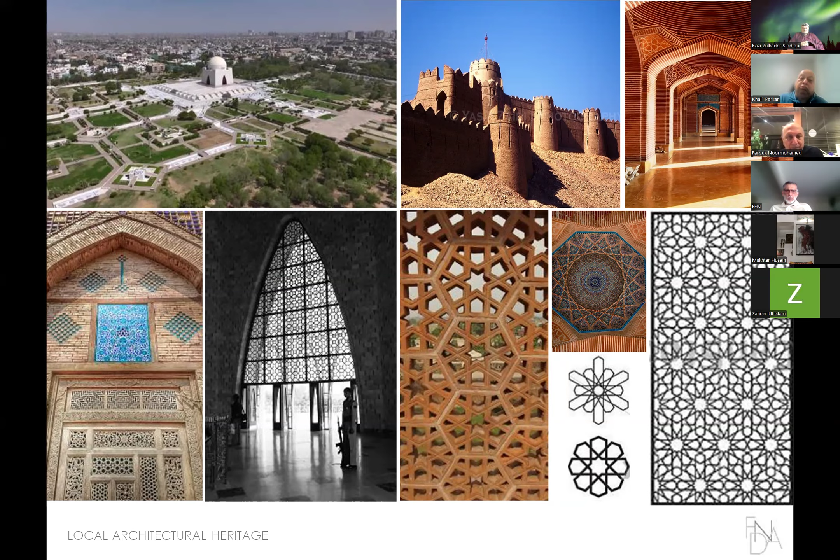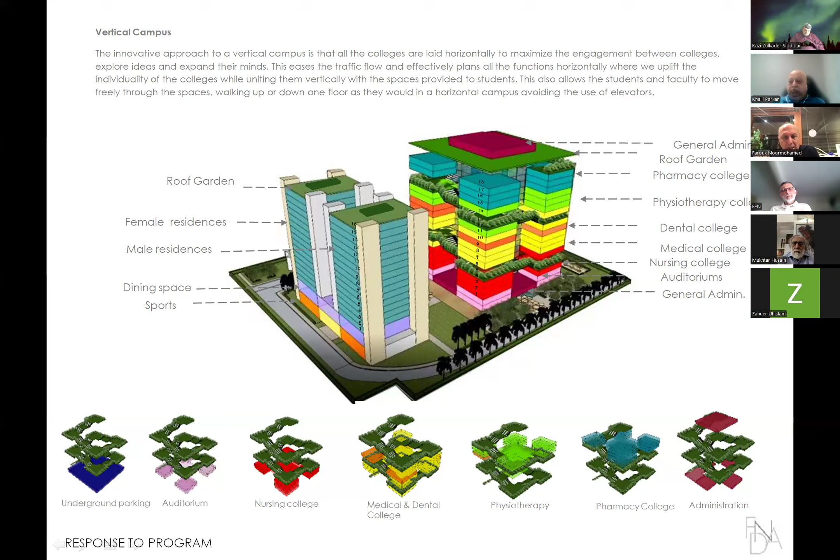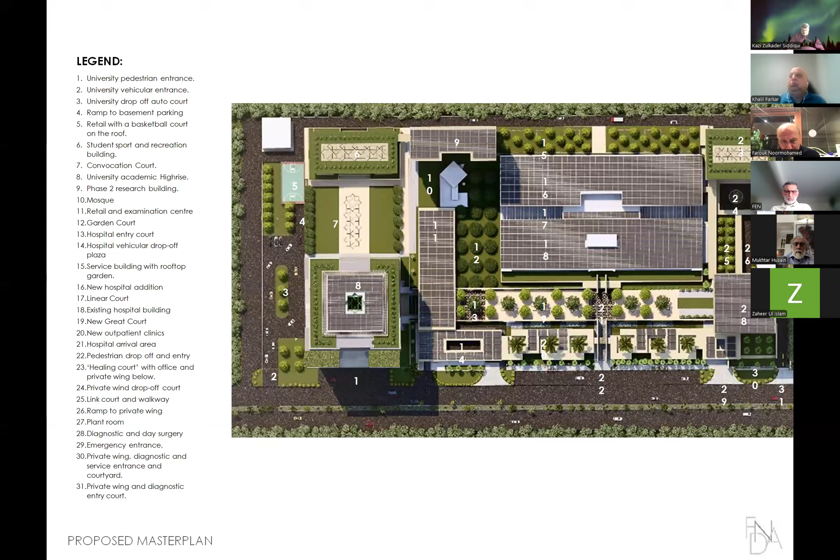So this is how it looks when it's all done as a tower. On the left is the academic, university portion, and the rest of it is the hospital on the right.

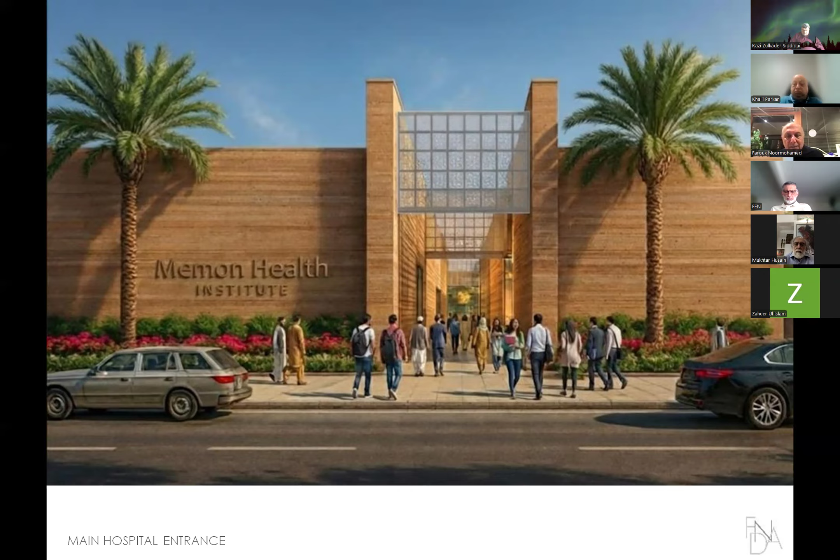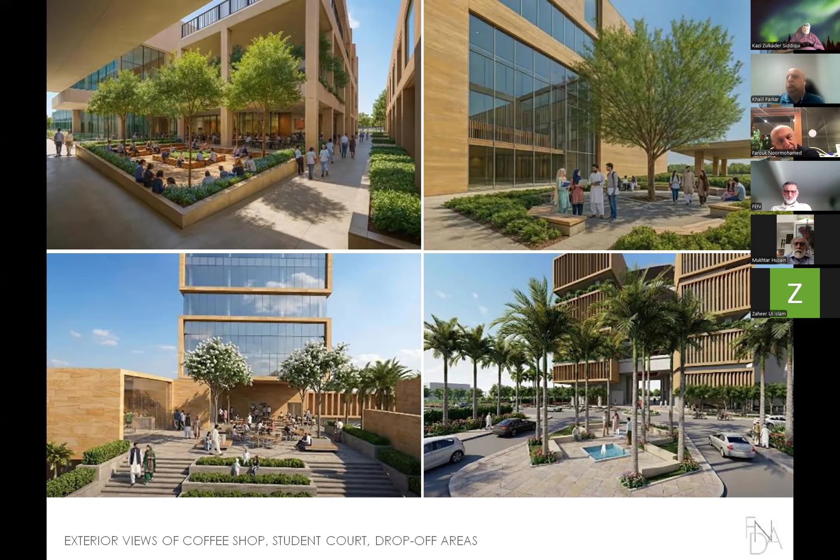So these are some of the images of what this campus is likely to look like. If you see the bottom left corner, you can see a courtyard that people are walking out. There are a series of sitting steps that wrap around this building, and there are courtyards that happen every few floors. As you turn around, you basically have courtyards.

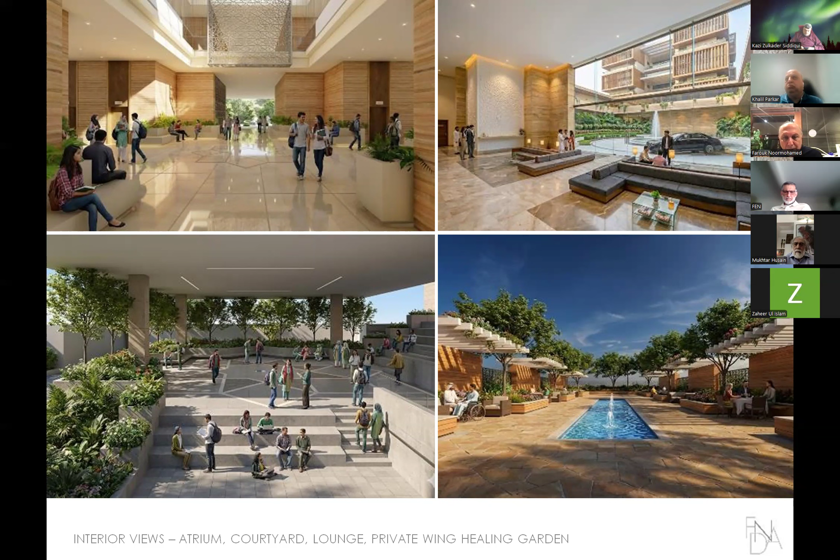The top left is the main entrance lobby of the hospital. On the top right is a view from the private wing drop off, and on the bottom you have what we call the healing gardens, which are going to be gardens set up on top of the roof of the private wing, where patients and families can come up and enjoy the outdoors and relax with their families.

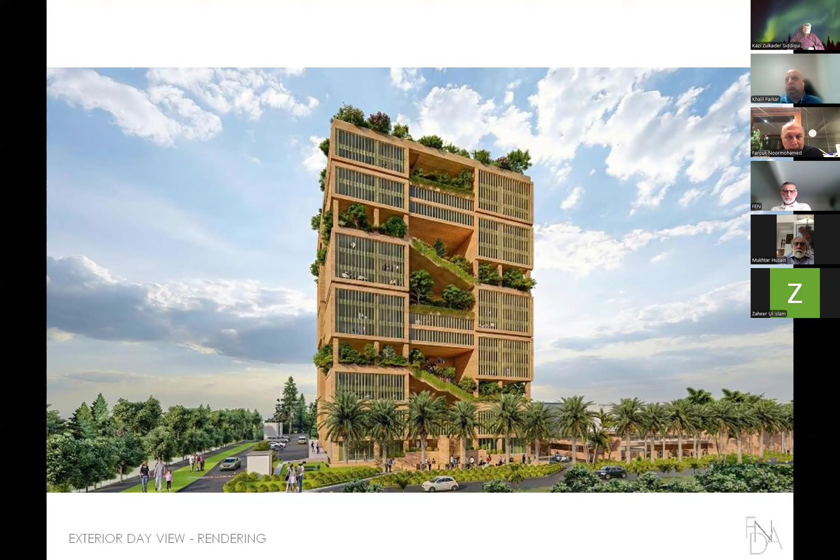So this is the tower. It's a green building, not only looking green but actually green in terms of environmental stewardship. We are looking at net zero or very close to net zero. It'll be gold or platinum LEED standard.

Next, the Aga Khan University. This was a large project. I'm sure all of you are familiar with the Aga Khan University in Karachi. I was part of the original design team that worked on the project in Boston with Payette Associates. Then I came to Karachi to do research on local materials and palette of materials, and led the interior design team and the architectural team.

So we did all the interiors of the project in Karachi, and then with the team we delivered the project. We had some 30 people working with us, and Tariq was one of my right-hand persons working through the project. We used extensive local materials, local techniques, and created a lot of employment, continuing to provide employment as the project is completed.

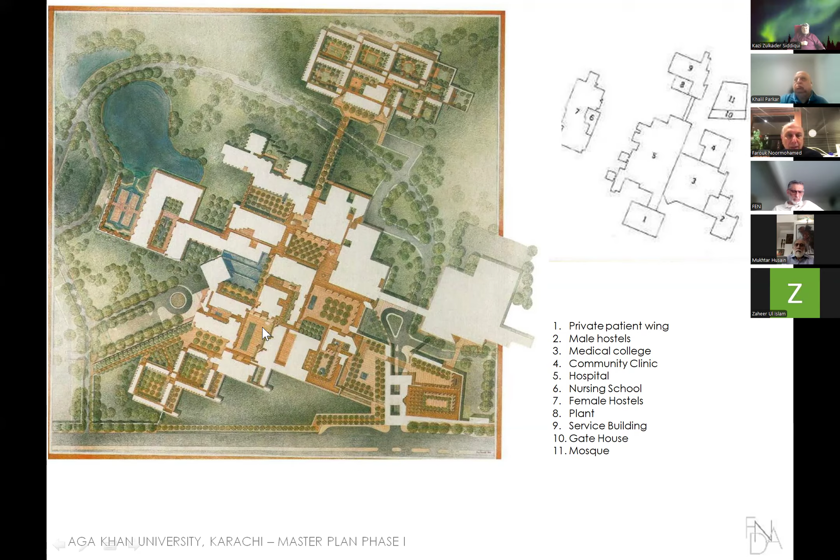Okay, so this is the overview of the campus. Even though when we built originally it was 1 million square feet, we are probably at 1.8, maybe 2 million square feet right now. You can see it's all interconnected courtyards, making you feel very comfortable in it.

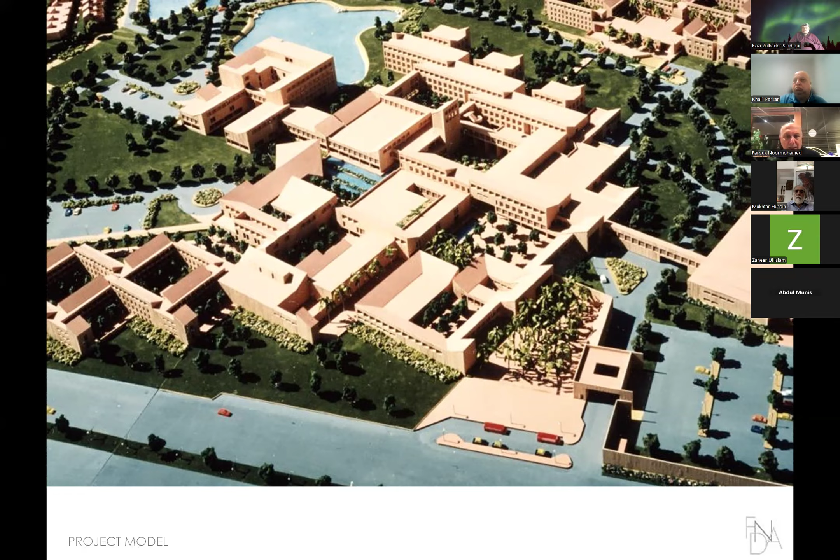Next slide just shows you some images of different areas of the projects that we have designed and may not have been built, but they are conceptual designs. So let's keep going.

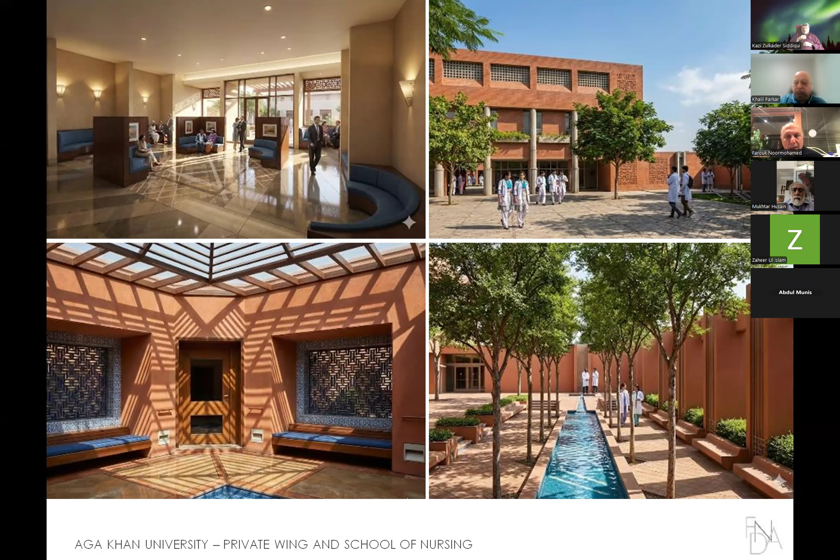These are views from the women's residence areas, some sitting areas outside the courtyards, the main private wing with a pond that we created for emergency water storage, with a filtration system that would allow the water to be used in an emergency situation.

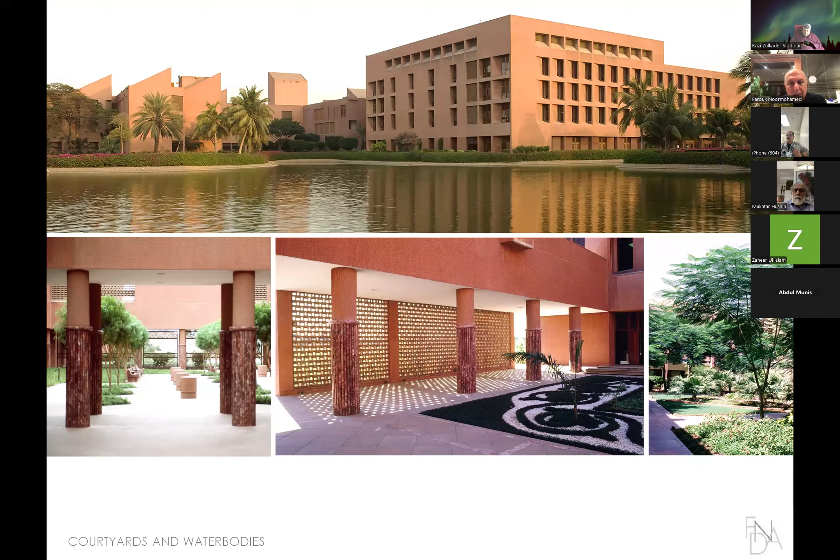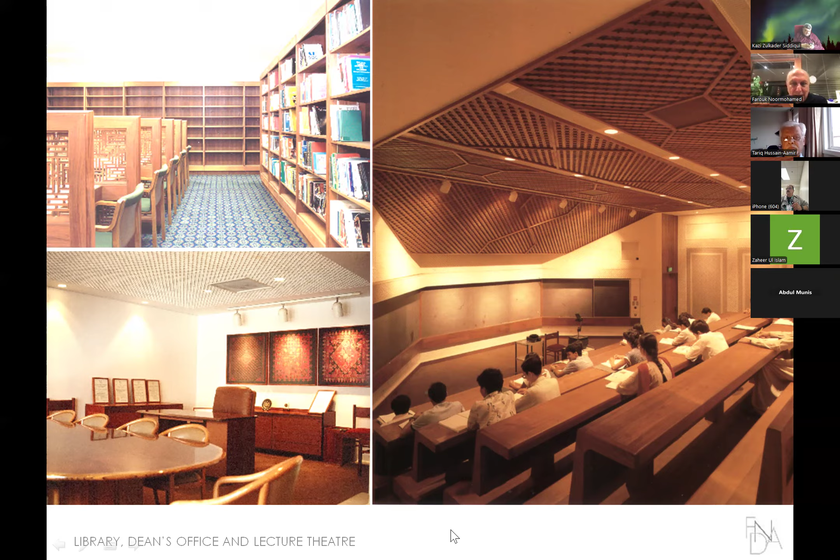Big auditorium, more lecture theater. The reason why I have this is it's a very important building that Tariq worked on after the project was completed.

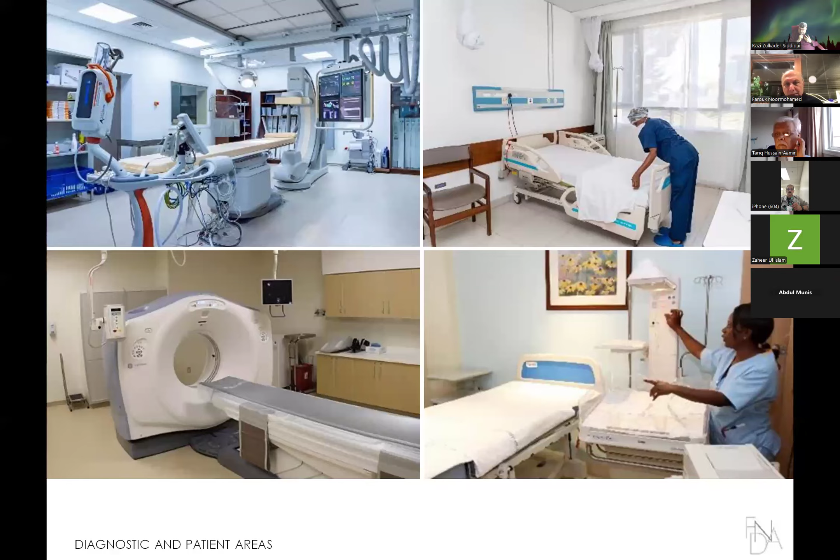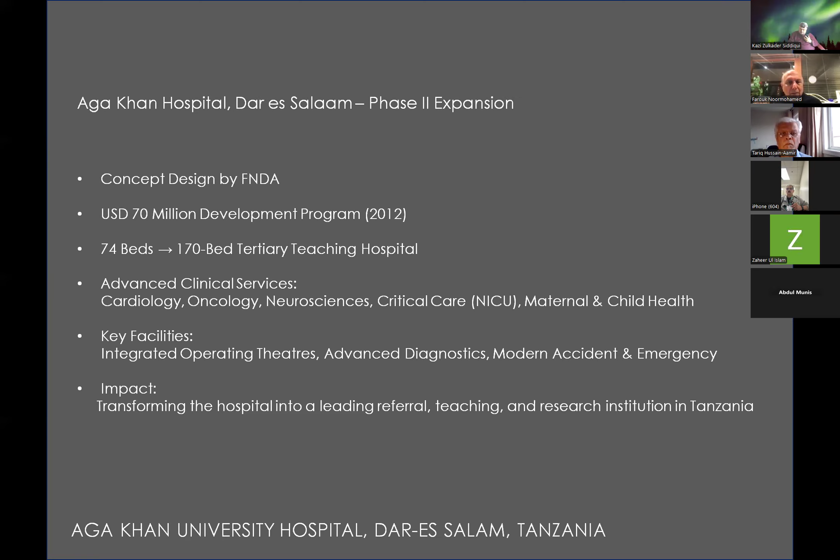And we were then invited to participate in the design of a major expansion in Dar es Salaam, and we completed all of the design work. Just keep going, Khalil. We did all of the conceptual design work and all the working drawings. And eventually, there was a major change in the program, and it sat for a while.

And then Payette Associates were brought in to do a full master plan. So this building was not completed, but we had pretty much done everything that was necessary for them to have built it.

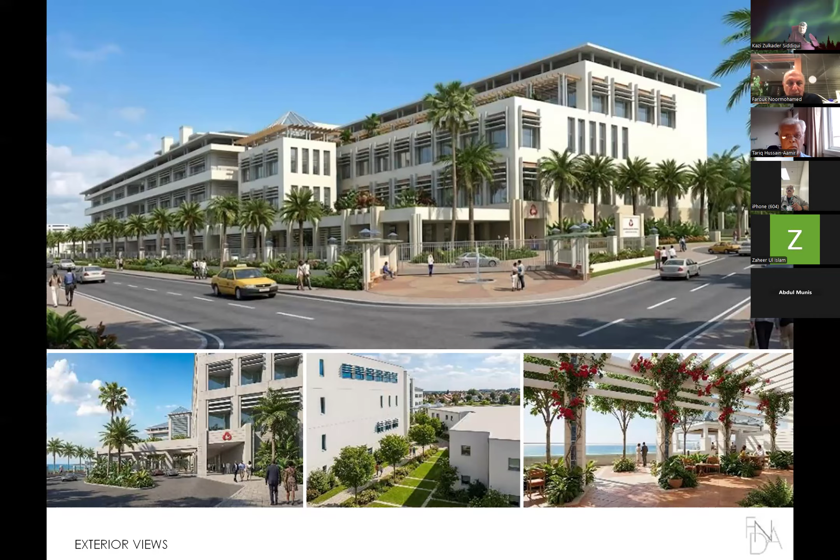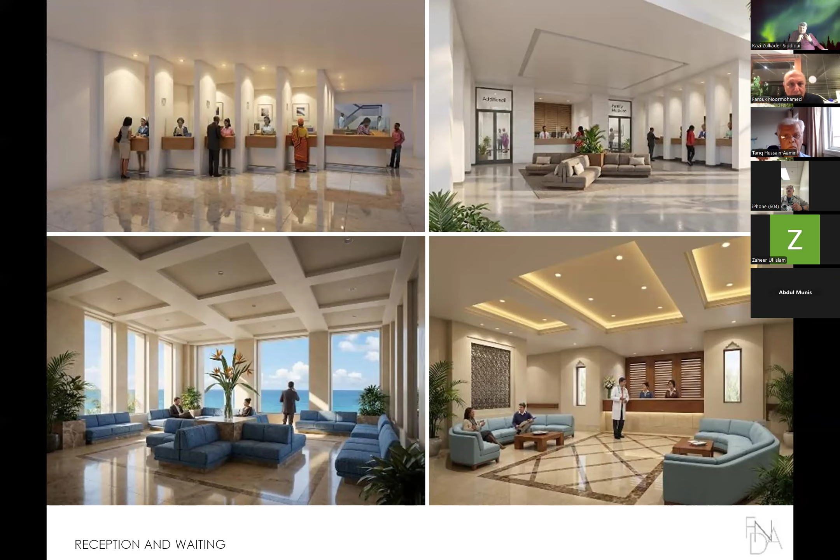So here's how it again integrated with the original campus that was there. There's one building on the campus, and this is how we linked it all up. Views of the diagnostic areas, all the reception areas, waiting areas, etc.

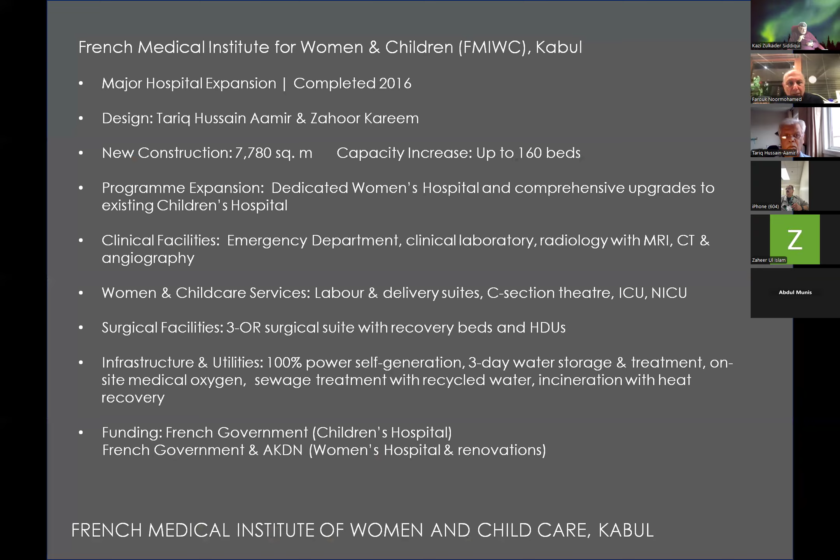And then Tariq was involved in the French Medical Institute in Kabul. It was a major expansion of the building, and this is basically the imagery of how it was integrated into the project.

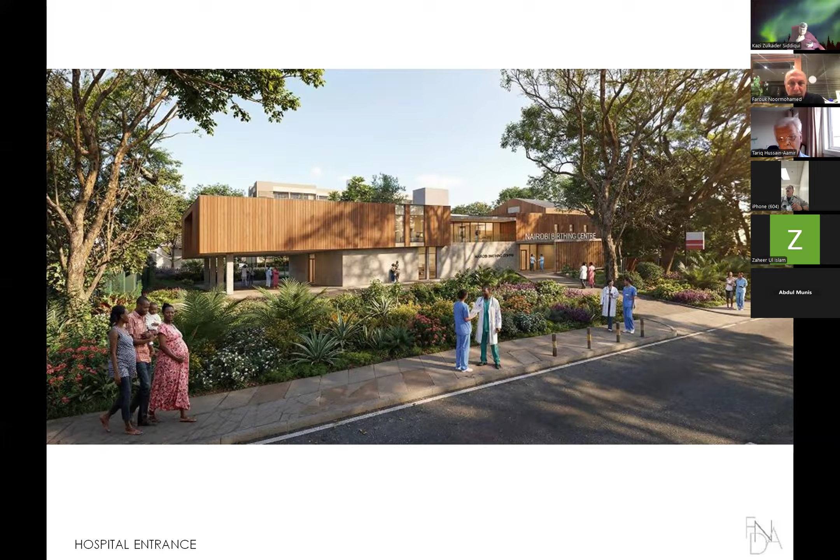Major facilities were added. Then we did a design competition and won the competition for a small birthing center in Nairobi, where basically this was going to be kind of a referral birthing center to the main Aga Khan University Hospital in Nairobi. So there was a small old building, and we added to it.

Then we were working with the Aga Khan University, who was looking at adding a whole series of little hospitals around the region in Kenya, and we came up with this idea of a micro hospital which had a vision of flexible, human-centered hospital which was scalable. It was a prototype proposed to management, and we were hoping it would go into force at some point, but these were thoughts that we had instilled in management to see how these referral hospitals would happen in the periphery of Nairobi and in Kenya generally.

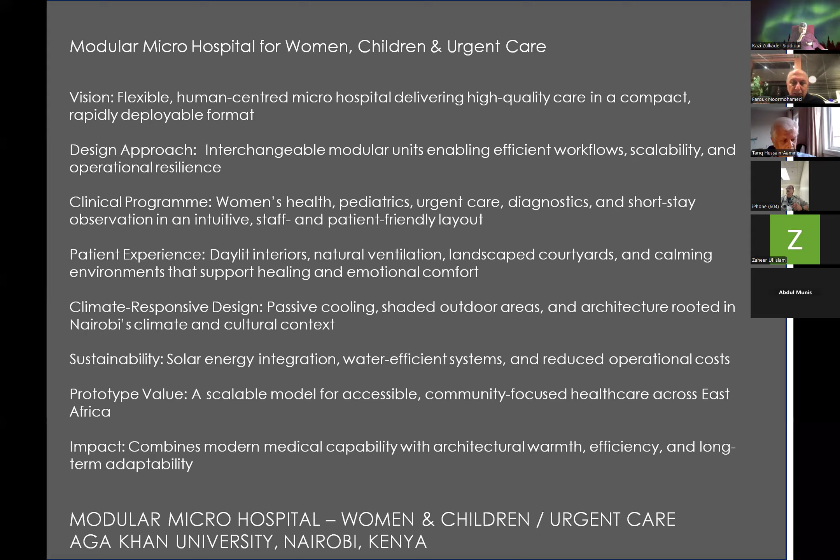So this is a small hospital that we were proposing, which was scalable.

Then we did a concept for a small hospital. It was in, what was it Khalil? Was it Indonesia or Malaysia? Indonesia. Indonesia, right?

So Khalil, you can go back to your full screen. Yeah, and it's a modular hospital, scalable, and very small, but very rural, but very easy to build, and very simple low-rise building, but basically having critical diagnostic and treatment facilities.

Next slide, so just some images of what it is. We can see it's very local in its execution and its architectural language. Next. Yeah, no elevators, just ramps, etc.

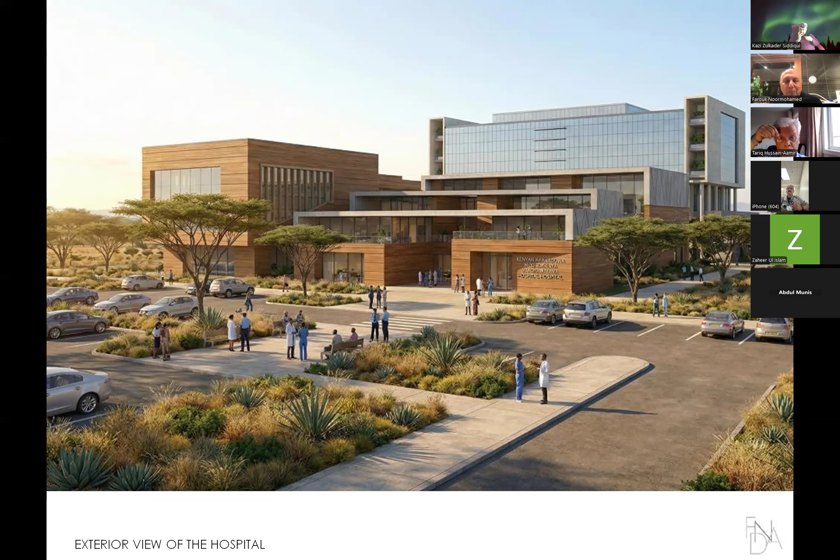So then we did a competition for a major hospital in Nairobi. This is a 700-bed hospital. It was an international competition, and we submitted the scheme, and we had the winning design. Next slide. We had a winning design of this campus, and politics and bribery basically moved the project to somebody else. So, but it was the winning scheme for this campus.

Next slide, Khalil. It had the medical college also as part of it, and again, it drew from the local vocabulary. The architectural language was from the local Nairobi context, and how we actually saw the podium of the building, basically taking cues from the local patterns of jewelry, etc. in Kenya. Next.

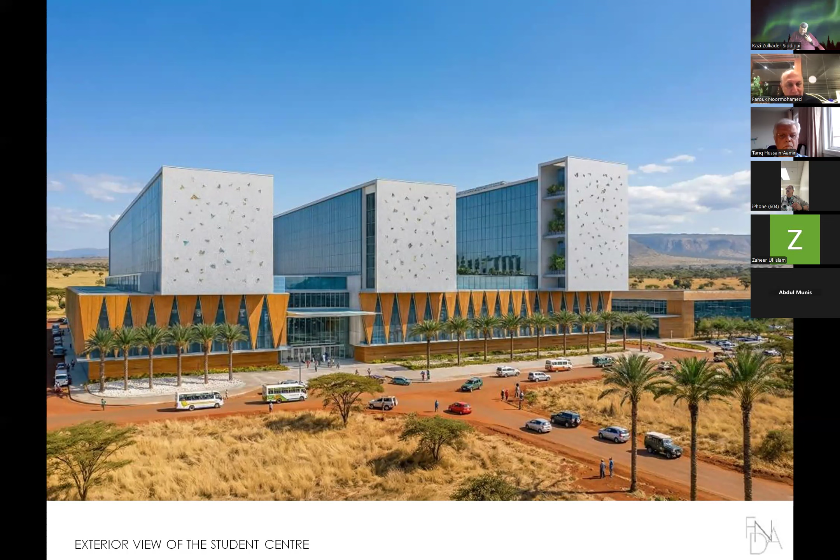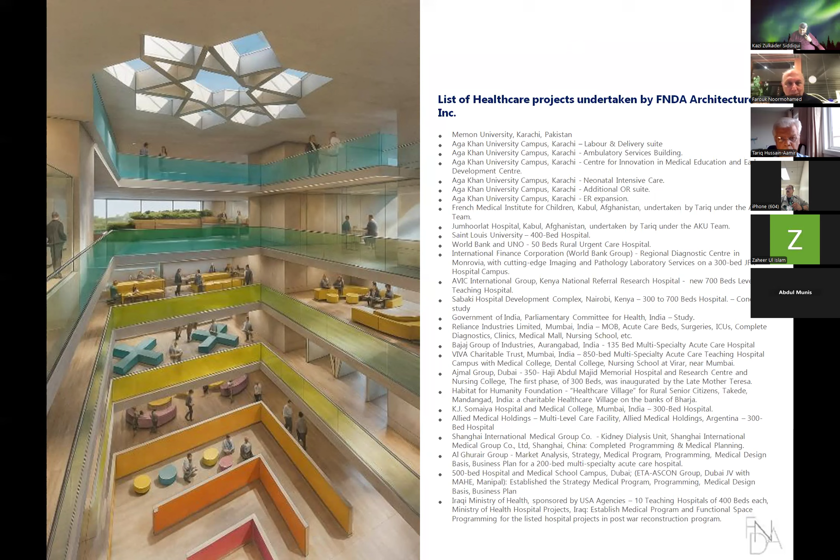So with that, we can go to the next slide, Khalil. So this is our understanding of the preliminary brief. Next slide, Khalil.

So this gives you a background of who we are, what we do, how we are all together, and we are here ready to serve you. So basically, go to the next slide, Khalil, and we can have a conversation on all of these aspects, which is budgets and next steps. But first of all, feel free to ask me any questions or clarifications that you might have, and then we can go into a discussion.

So either I didn't do a very good job or everybody liked what we saw. Any comments? Any... Thank you so much.